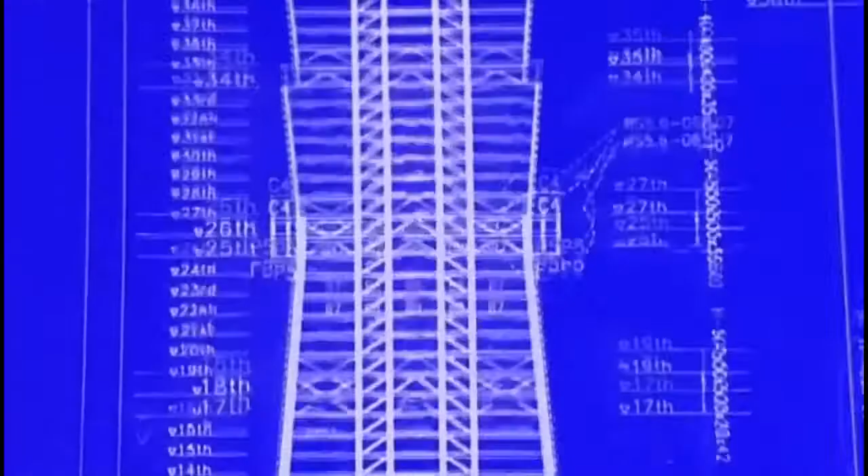Taipei 101, the world's tallest skyscraper. 508 meters of the most high-tech engineering and construction on the planet. Mixing ancient values with cutting-edge technology and taking the heart of Taiwan into the future.

Designing and building the world's tallest skyscraper is no easy task. But here in Taipei, two of the most powerful forces of nature, earthquakes and typhoons, combine to make going super tall a super challenge. I mean, any tall building in the world is a feat of engineering. Using world-leading engineering and construction techniques, Taipei 101 not so much conquers nature, but outsmarts it.

This is the only super tall building in the world that's designed in a seismically active zone. This has never been done before, certainly not to this scale. The result is a man-made marvel, a unique megastructure of unprecedented size, shape and technology, built to withstand the very worst that nature can dish out.

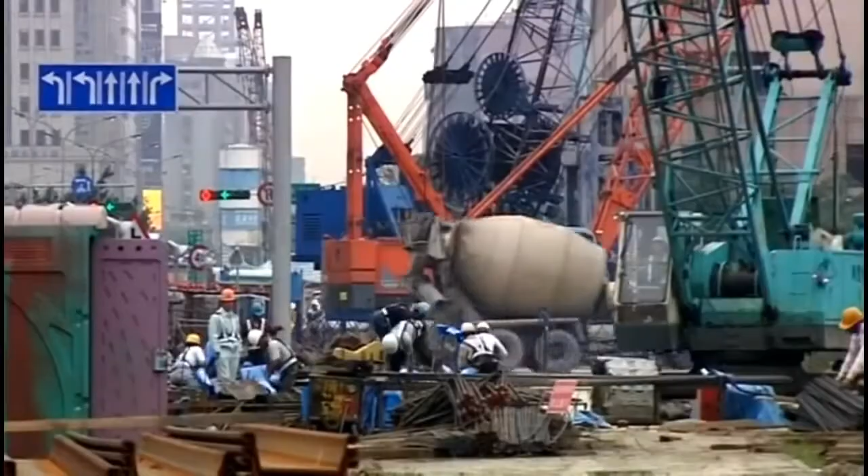If you're looking at the history of skyscrapers, really you begin in America, Chicago and New York are the classic cases. But in the last, let's say, 10, 15 years, Asia's really boomed with regards to the building of large structures. In recent years, Asia has seen an explosion of mega-scale building and industry. The region now holds 8 of the world's 10 tallest buildings. And as modern construction methods and materials continue to improve, designers will continue to aim ever higher. Not because they have to, but because they can.

Developer Harris Lin is one of the most powerful and successful businessmen in all of Taiwan. A member of a major construction dynasty, for him, Taipei 101 is the result of a lifelong ambition. Since I was a boy, I have dreamt that one day I would build a great building, one which will benefit later generations for a very long time.

For Harris Lin, Taipei 101 is more than just a building. It's a statement on Taiwan, its people and its future. A notice to the rest of the world that Taiwan has the technology, the industry, and the determination not just to join the giants of global industry, but to lead them. There's no better way, really, of getting global attention than building these super tall buildings, particularly if it's the highest in the world.

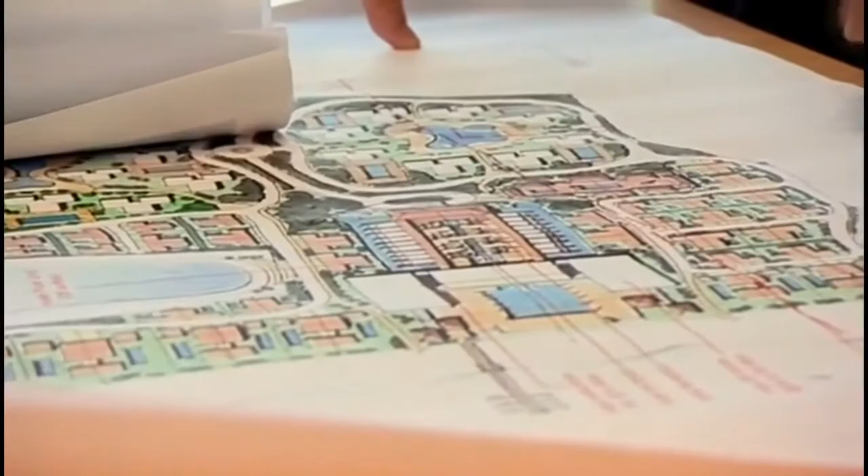Initially earmarked as the centerpiece for the growing and glitzy Xinyi district known as Taipei's Manhattan, the primary goal for the building is to be the best, but not necessarily the tallest. Long-standing friend of Harris, architect C.P. Wang from C.Y. Lee & Associates, comes into the project in the early stages. We started with 3 buildings, a 60-story building in the center and 2 smaller buildings that are about 20 stories for the different shareholders. But plans quickly evolve as key investors clamor to have the building push up, not out.

The planned 60 stories soon turns into 88. And with the mantle of the world's tallest a mere 13 floors away, the momentum becomes unstoppable. We truly believed we could do it. That if we worked hard, we could make a building that was visible to the entire world.

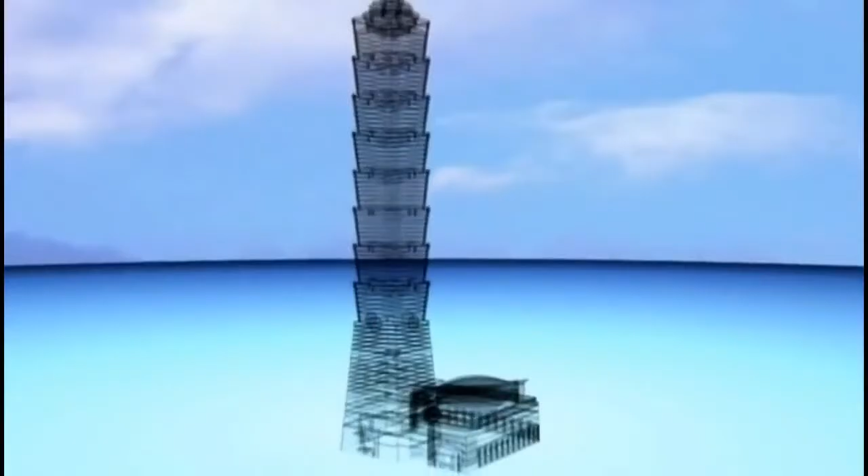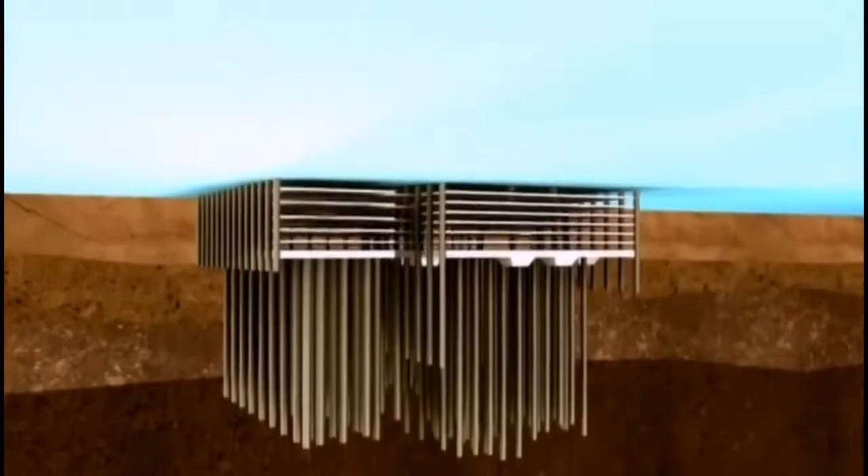But three factors combine to make this project not only the tallest and most visible in the world, but also one of the most difficult to build. Taipei City is an inhospitable place to build a skyscraper. Beneath the earth, a thick layer of soft clay demands uniquely designed foundations. While above ground, the threat of earthquakes and typhoons requires a level of engineering and construction never before achieved.

If Harris Lin wants to make the tallest building in the world here, his engineers and builders will have to confront the power of the earth. Designing a structure flexible enough to resist an earthquake, but stiff enough to resist a typhoon. Contradictory requirements that until now have never been combined. All these different mixtures of elements have to be blended almost superbly in order to make the building achievable.

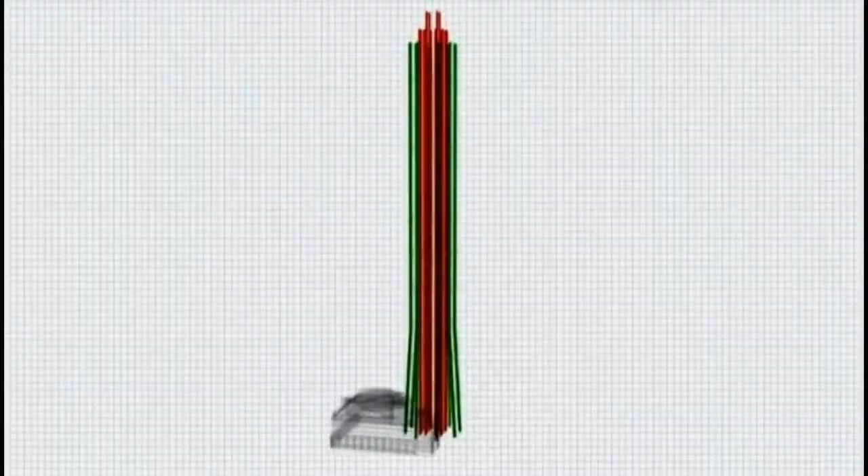The solution will combine two revolutionary systems. First, a braced megaframe joined to 8 super columns filled with a mixture of steel and concrete. And a tuned mass damper, a giant pendulum, the weight of 10,000 people, designed to oppose the effect of wind. The combination of these two concepts is groundbreaking. I am very proud of it, and as architect, you don't get a lot of opportunity to work on something of this magnitude.

Construction will take 6 years, 2,000 workers at any one time, and 700,000 tons of the most advanced steel and concrete ever made. These cost more than the national GDP of some countries. Yet despite all the investment, ingenuity, and determination of humankind, the forces of nature can strike at any time, whether you're ready or not.

Taipei 101 will be built to withstand earthquakes and typhoons, but it also needs to withstand the test of time. To be a true landmark, it must look unique. Its appearance mixes traditional Chinese icons, bamboo for strength and resilience, a pagoda for serenity, the perfect form of an open flower, and the luck and prosperity associated with the number 8.

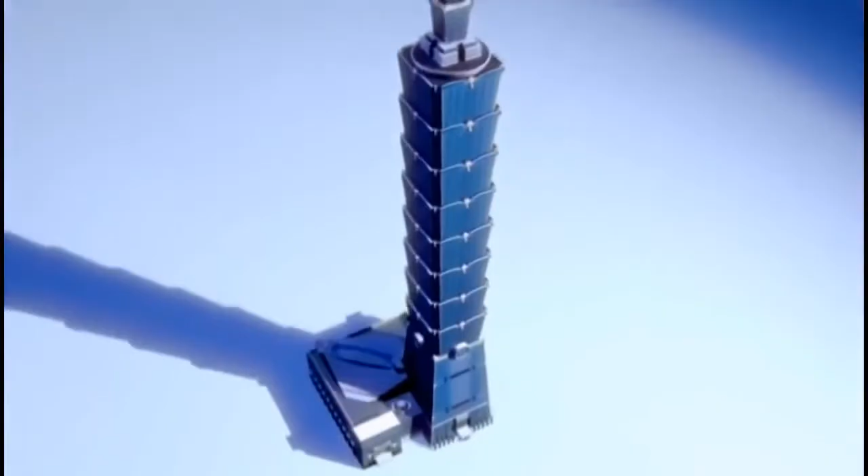We tried very hard to do something that we hope can represent the city, the island, as well as our culture. The result is this: 508 meters tall, 101 floors from ground level. A building that looks completely unique, but soon proves challenging to build.

Every major skyscraper in the world is a trade-off between what will look good and what will stand up. For a tall building this height, you cannot escape the practical matters. It has to work. Taipei 101 will be the tallest skyscraper on Earth. And the forces on a building of this scale are truly immense.

Gravity forces it down, while wind pushes it sideways. Existence is a tenuous balance between being strong enough to stay up, but not so heavy as to cause collapse. Most skyscrapers have exterior walls that are either straight up and down or sloping in. But Taipei 101's unique shape sees much of its exterior surface sloping out.

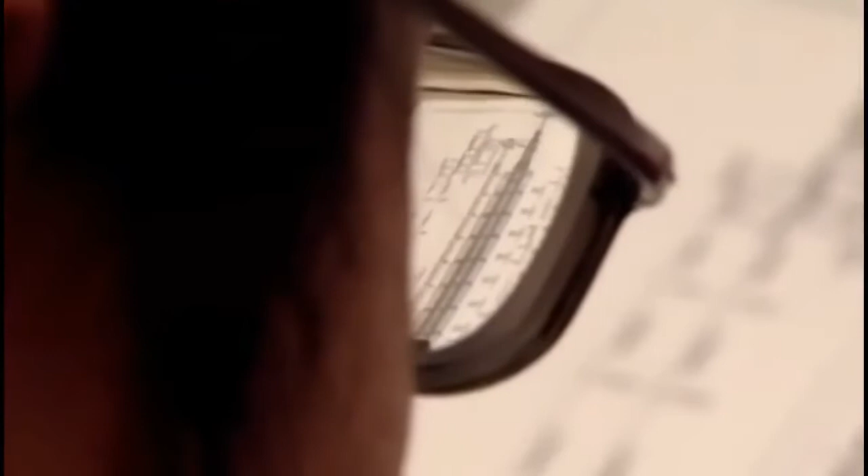Here at Evergreen Consulting, engineer Shaw Shi oversees plans that will translate Taipei 101's unique exterior into one of the strongest, lightest, and most resilient interiors ever made. The shape of Taipei 101 is more complicated than regular tall buildings, because simple and straight lines will be easier to work with.

Aesthetically, Taipei 101 is broken into sections resembling a stem of bamboo. But similarities with this fast-growing superplant don't end here. Just like bamboo, the distinct structural sections of 101 strengthen and support the whole building. Each section operates as an independent unit, transferring the building's massive weight away from the outside of the building and into the middle. The result is a stronger, lighter, and more flexible tower.

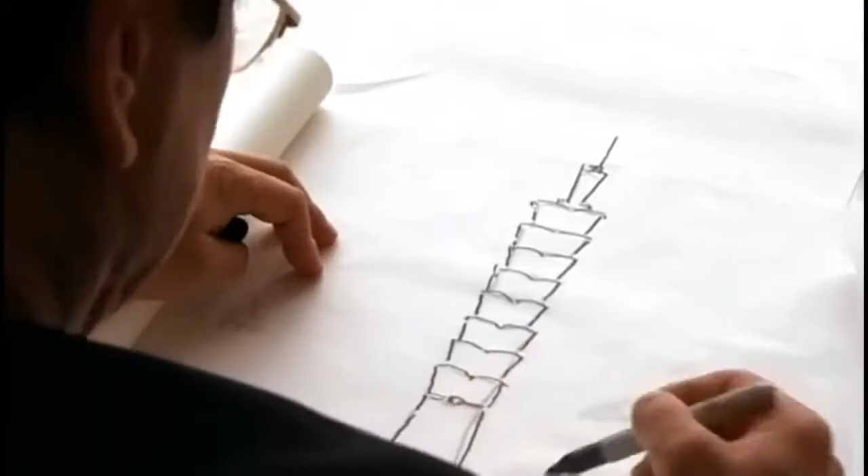For CP Wang, this sort of lateral problem solving has been integral to the success of the project. Their aim is not just to be the highest, but to be their innovative best. Let me put it this way, it's not like the Wright brothers when they invented the airplane. You know, today a lot of people know how to build an airplane, but how good it is matters.

The design of Taipei 101 requires unique engineering to facilitate a unique shape. But the next challenge facing designers pushes this engineering to the limit. How to make the tallest building in the world stand up against two of the mightiest forces of nature in one of the most hazard-prone cities on Earth.

Every year, the people and buildings of Taipei are under attack from two of nature's most primal and unstoppable phenomena. When you put a tall building on an old secondary earthquake fault line, which runs nearby here, and in a place where you get significant typhoons, that just has major challenges.

The problem is that to resist wind, a building must be stiff. But to survive an earthquake, it must be flexible. Taipei 101 will have to be both. This is the only super tall building in the world that's designed in a seismically active zone. This is really pushing engineering and construction boundaries right to the limit.

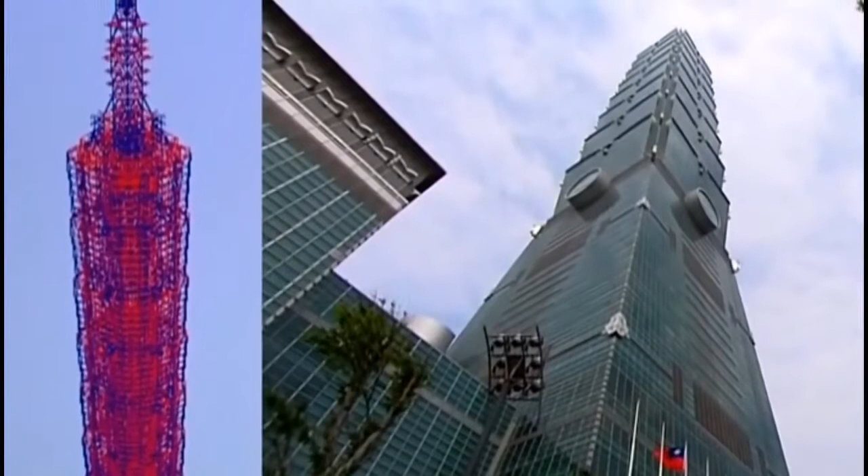Superficial damage like broken windows or walls can be repaired. But any damage to the internal steel framework of a building can be a disaster. As the tallest building in the world, Taipei 101 must be engineered to withstand major earthquakes. But just how major is something of a mystery.

Geologist Dunstan Chen is one of the scientists charged with finding out the details. This is when we make the first design, okay? We have to consider this fault. We know there's a fault somewhere here, but we don't know exactly where it is.

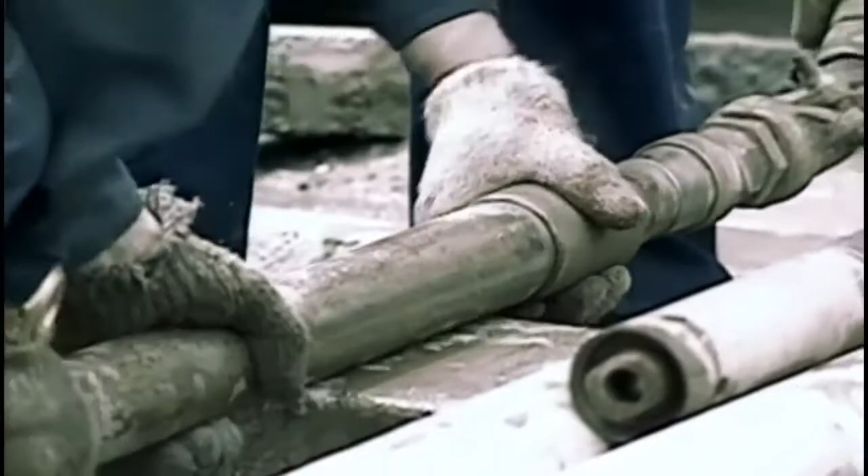An investigation is launched involving some of Taiwan's leading geologists to find out where the fault is and how far it is from the Taipei 101 site. They need to establish if it's active and how they should deal with it. The results shock everyone. Then we drill number 4. Okay, we encountered the fault. And this fault actually, the gouge was around 10 meters thick. It's a huge one.

In most earthquakes, the closer the building is to a fault, the worse the impact. The fault found by Dunstan and his colleagues is not only huge, it's close. Only 200 meters away from the 101 construction site. 101 must be prepared to face the most extreme earthquake shocks imaginable.

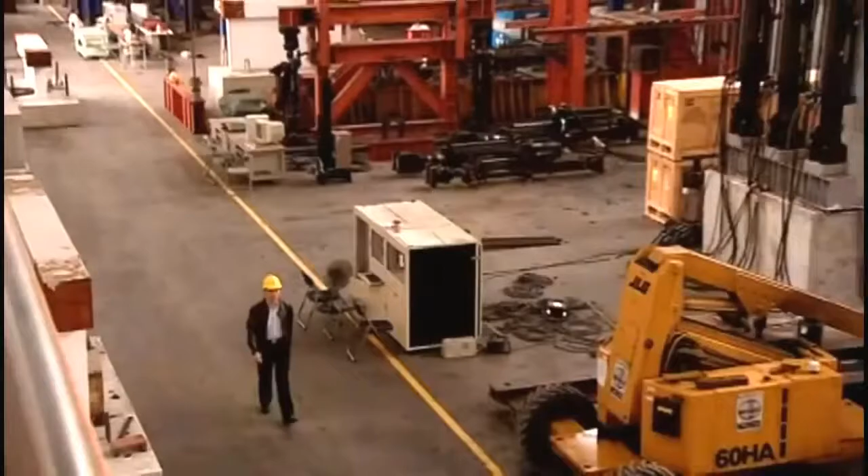Here at the NCREE facility, scientists use a multi-dimensional shake table to simulate a variety of different earthquake scenarios. Scale models of different structural configurations are tested, and the information gained helps to design buildings that are better able to withstand the devastating impact of earthquakes.

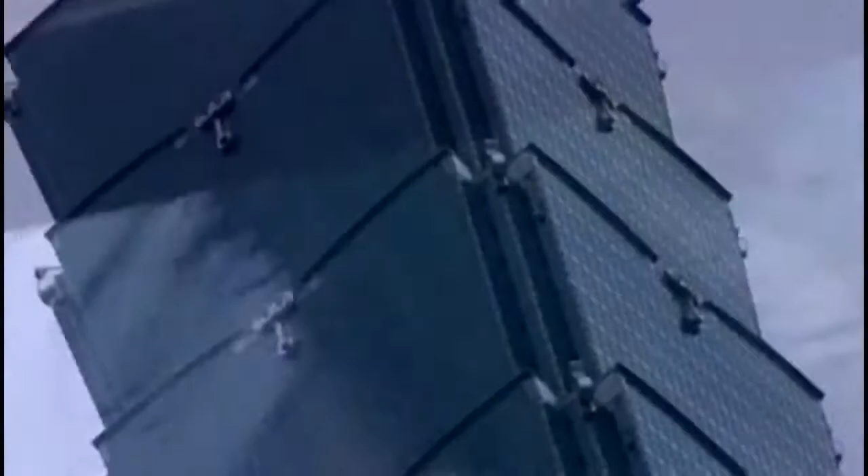An earthquake shock delivers brutal vertical, horizontal, and twisting strain on a building. Every joint of every structural element is strained, and if there is one weak link, the whole lot can go. To keep 101 standing in a major earthquake, engineers develop a complex internal megastructure. The central core of the building is connected to 8 incredibly strong supercolumns by a network of horizontal outrigger trusses.

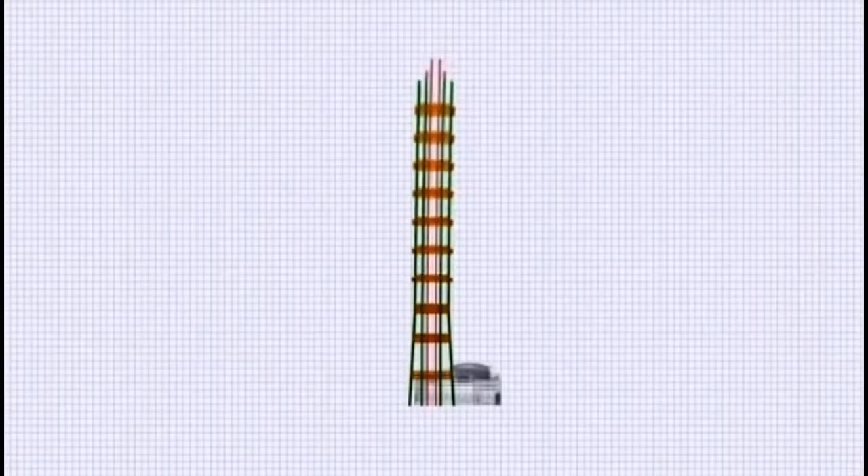The supercolumns act like a giant flexible spine, enabling the building to flex and move if it needs to, but not break. Although the idea of supercolumns has been used in other buildings before, the size of 101 takes this engineering to an entirely new level. But the threat of earthquakes isn't the only natural force that builders of Taipei 101 have to worry about.

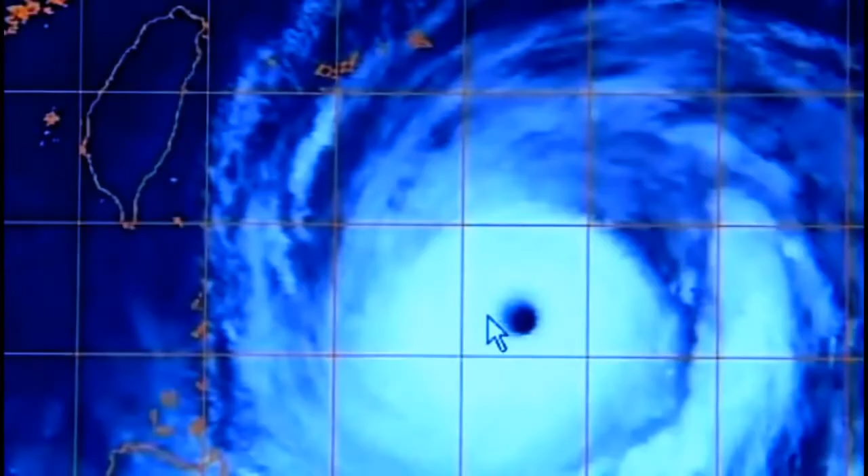Every summer, unstable equatorial air off the coast of Taiwan generates vicious typhoons that lash Taipei. These intense tropical storms, with winds of up to 200 kilometers per hour, can literally blow a building to pieces. But it's not just strong winds that designers of 101 have to worry about. The surface area of a skyscraper is so huge that even a small breeze can still have a major effect.

As wind hits a building, it impacts in 2 ways. First, the exposed face of a building can be pushed by the wind like a giant invisible hand. But under certain conditions, the wind can generate pulsing vortexes on opposing sides of the structure. The vortexes begin to oscillate, exerting small but consistent pushes on alternating sides of the building, eventually causing it to sway. Like a child pumping their legs on a swing, each gust of wind adds energy.

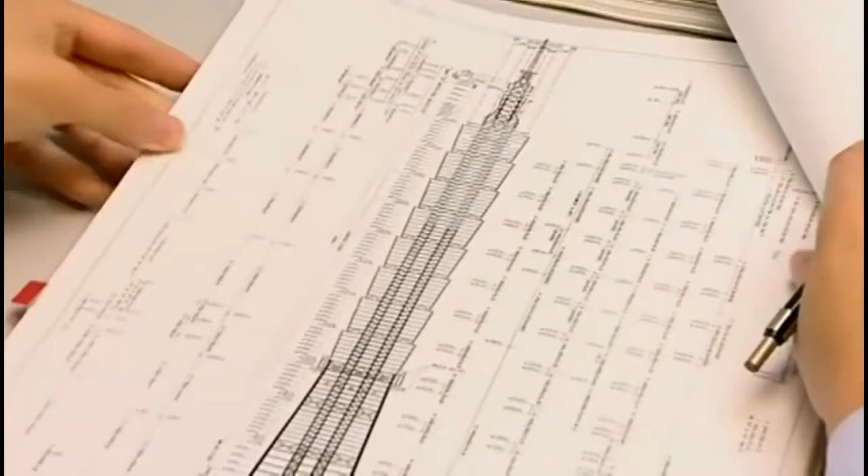This swaying can be so severe that occupants of high-rise buildings can experience motion sickness. Normally, engineers can accommodate this problem by making the internal structure of a building stiff and rigid. But being stiff is exactly what designers don't want in the event of an earthquake. Can engineers of 101 design a building that is both stiff and flexible at the same time? For the project to go ahead, they have to.

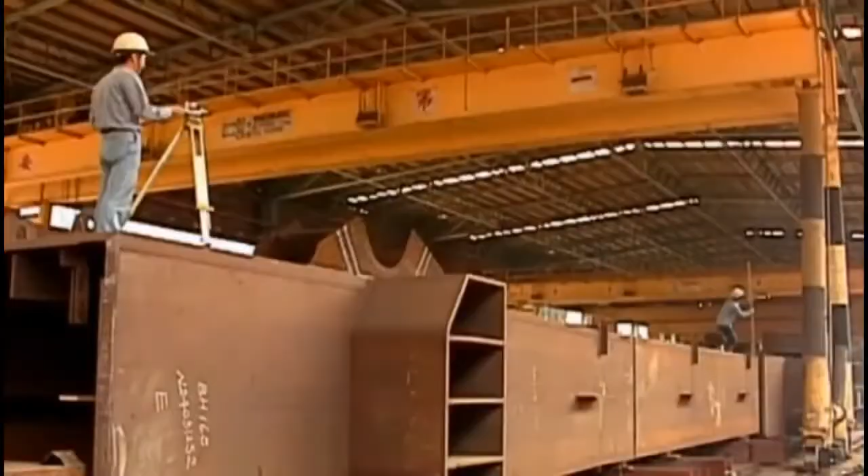Taipei 101 is so massive that finding ways to minimize the effects of wind is a vital element of its design. Engineers and scientists begin with the building's exterior. They find that by using re-entering or saw-toothed corners, the flow of wind around the building is drastically reduced. The results of wind tunnel testing: the re-entering corners help to reduce the dynamic wind response by 30 to 40%.

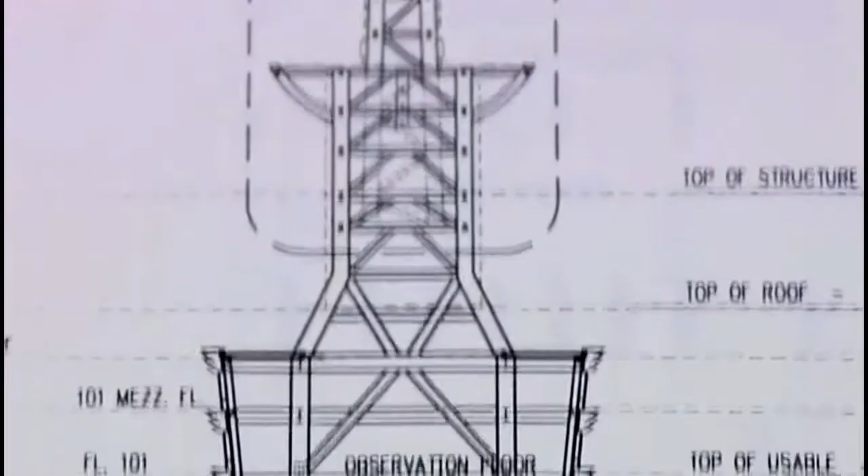Saw-toothed corners on a building hinder the formation and impact of the small wind vortexes that can cause it to sway. But just like the pumping of a child's legs on a swing, where each push adds energy to the last, even when the effect of wind on a skyscraper is reduced, energy will continue to gather unless it's removed. It's not the size of the push that matters, it's the repetition. If engineers can find a way of canceling this accumulation of energy, then the building's contradictory requirements of strength and flexibility will finally be met.

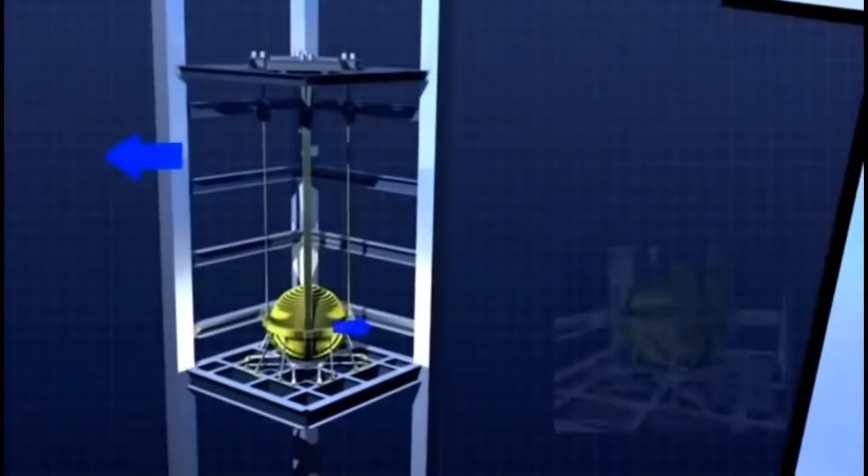Usually, a lot of tall buildings use so-called computer-controlled mass to do that function. In our case, I think our very smart engineers came up with this passive tuned mass damper. The passive damper on 101 uses a huge weight hanging from an upper floor to counter the effect of wind. As Taipei 101 sways in one direction, the tuned mass damper swings in the other, cancelling the buildup of energy and reducing the building's motion.

Engineers of Taipei 101 have made the impossible possible, designing a building that is stiff enough to survive a typhoon, yet flexible enough to survive an earthquake. But although these ideas seem to work on paper, they are yet to be proven in practice. 101 is going to need a lot more than just new design to combat nature. It's going to need entirely new materials and construction methods as well.

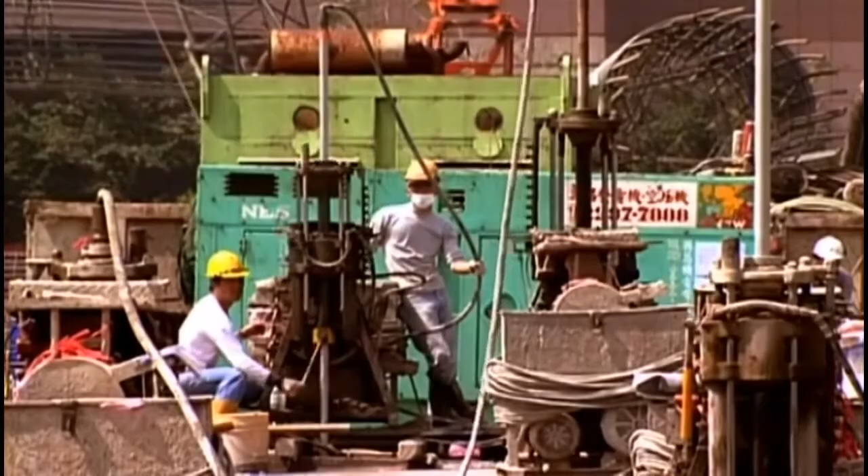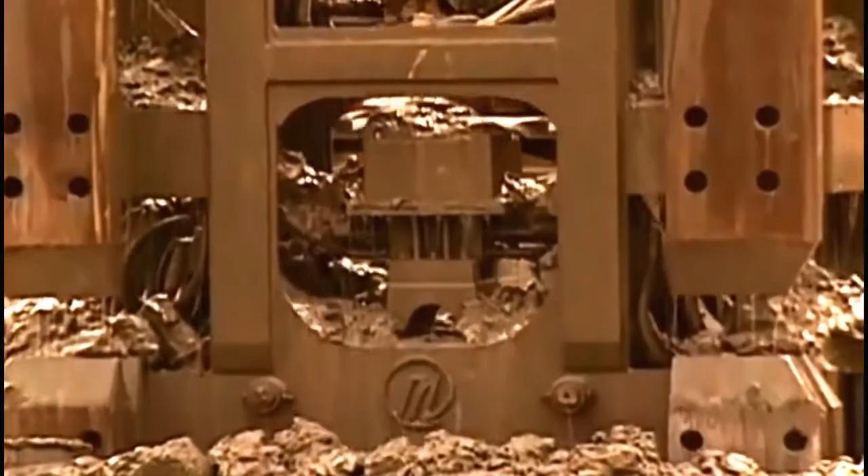Taipei 101's unique megastructure and wind damper will make the building resist the impact of earthquakes and violent storms. But all of this engineering means nothing unless the giant building has a solid foundation on which to sit. Finding solid ground in Taipei is a lot harder than it sounds. Over hundreds of thousands of years, changing sea levels have filled the Taipei Basin with layers of soft, unstable silt and clay. In order for the tallest building in the world to remain standing, its foundations must penetrate through this layer, sometimes 60 meters thick, to find the solid bedrock below.

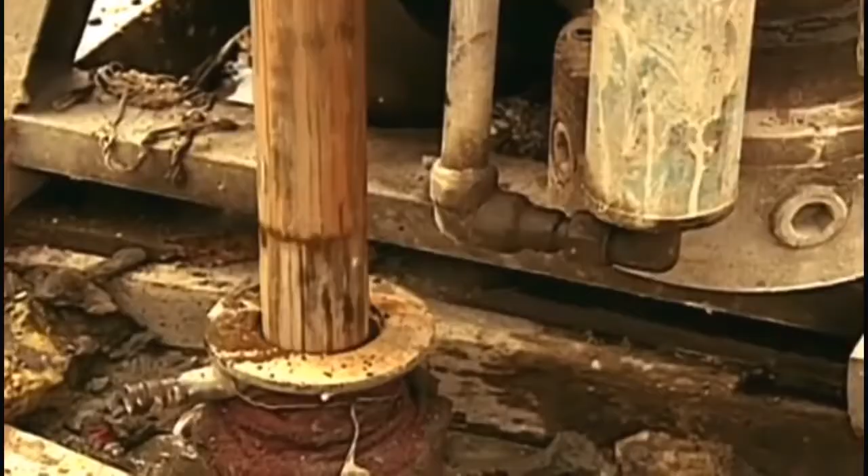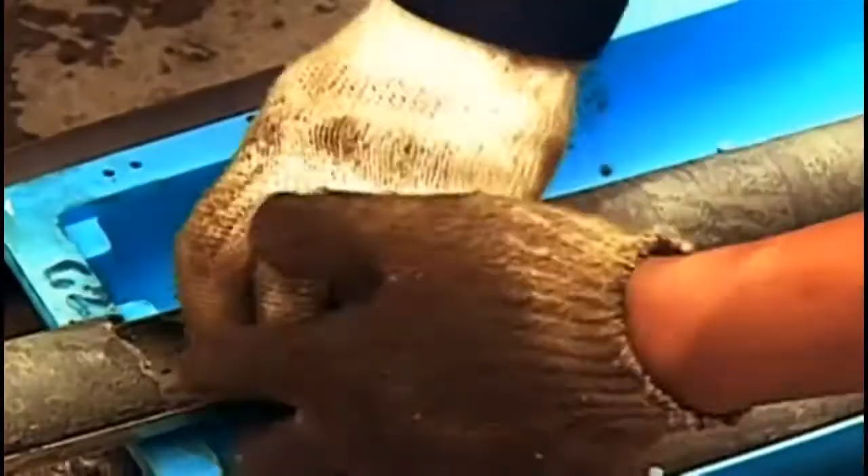Geotechnical engineers spend 8 months collecting core samples to analyze the soil on the building site. They find 3 distinct layers of soft sediment before finally reaching solid ground. This information helps designers to develop detailed plans for 101's foundation structure. Preparing the foundations takes 15 months and removes 700,000 tons of earth from the site. The foundation of a skyscraper is one of its most vital structural elements. It must distribute the building's enormous weight evenly below ground, at the same time creating a super strong base for the towering megastructure above. That's the key point for the whole building, that the building can stand up into the sky.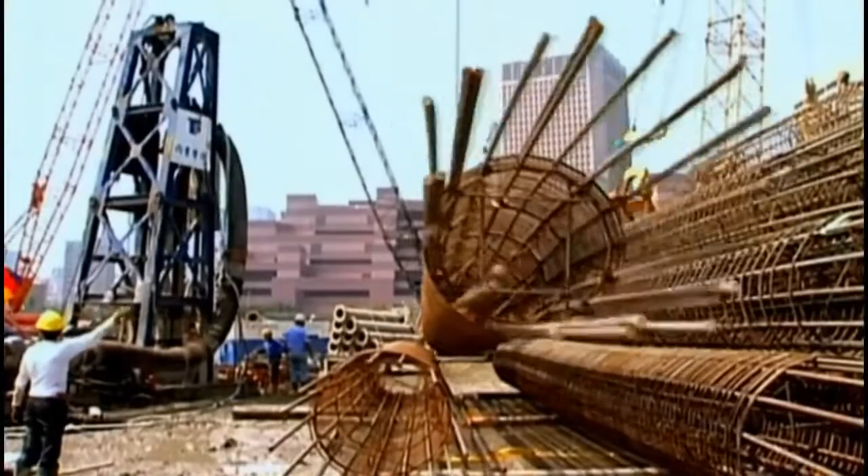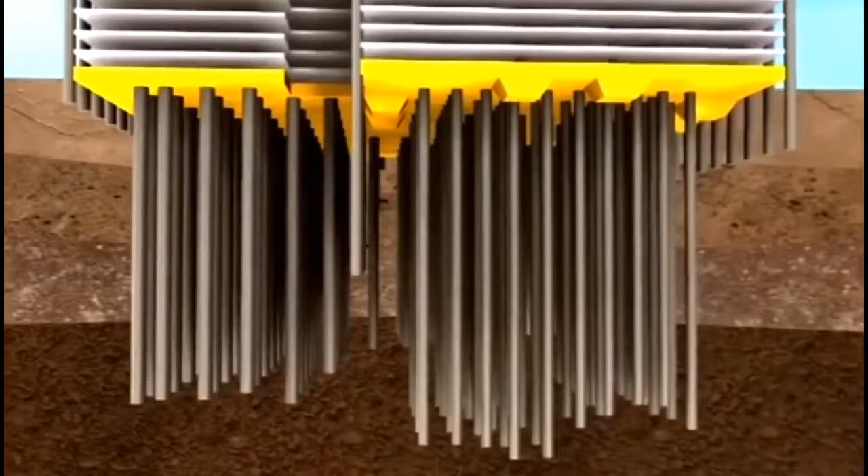To compensate for the inherently unstable ground of Taipei, 101's foundation is designed to literally pin the building to the deep layer of bedrock below. A 23,000 cubic meter concrete slab sits on top of a complex system of 382 reinforced concrete piles. These piles transfer the building's weight and structure deep into the bedrock, meaning 101 is more than just resting on the earth. It's fused to it. This unique foundation, combined with 101's mega frame and damper, give the building an extraordinary earthquake safety rating that exceeds even that of Taiwan's nuclear power plants.

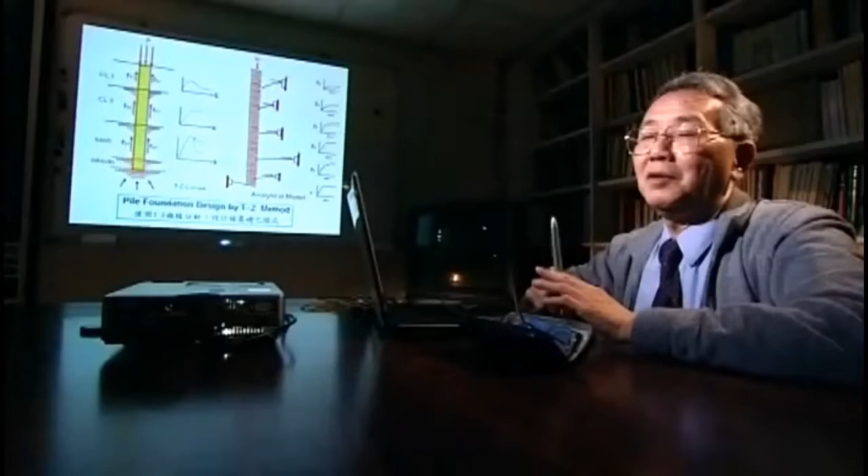Inside the 101, during an earthquake, you watch out for the falling articles, okay? Rather than worry about the falling of the building. Taipei 101 will not just be one of the strongest and most stable buildings in Taiwan, but one of the strongest and most stable buildings in the world. Building on the main megastructure begins in September 1999. If I look back, I feel it was more difficult than I expected. But I didn't feel that way when I was working and solving the problems every day. This isn't a construction workforce, it's a construction army.

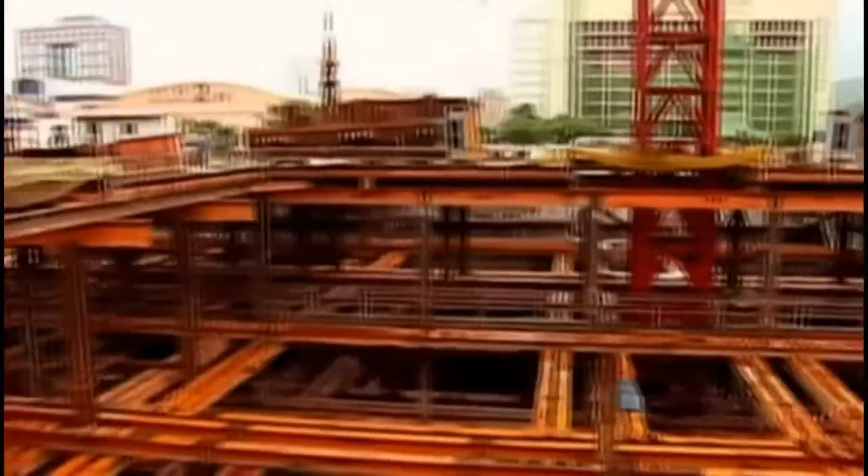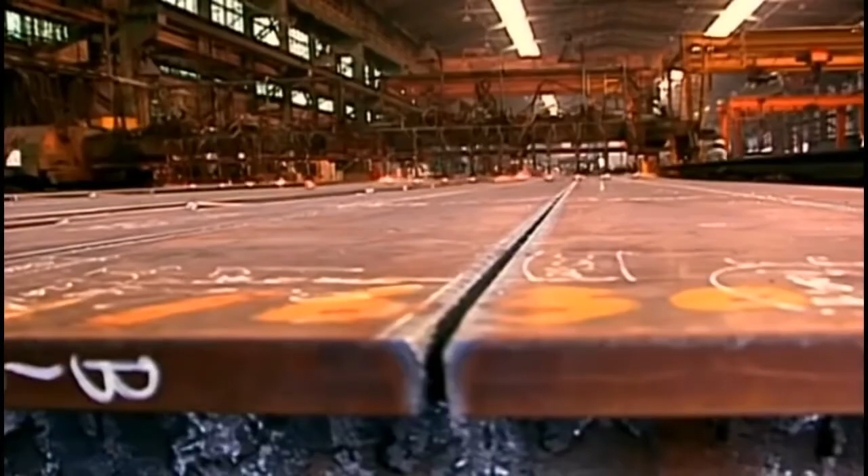Here at the Kaohsiung China Steel Plant, some of the most high-tech steel manufacturing techniques in the world are being used to build the various elements of 101's groundbreaking megastructure. The basic idea of this building is so-called double tube structures, which means we use the steel frame to create the outside tube, and then we use the steel frame and the concrete columns to create inner tubes.

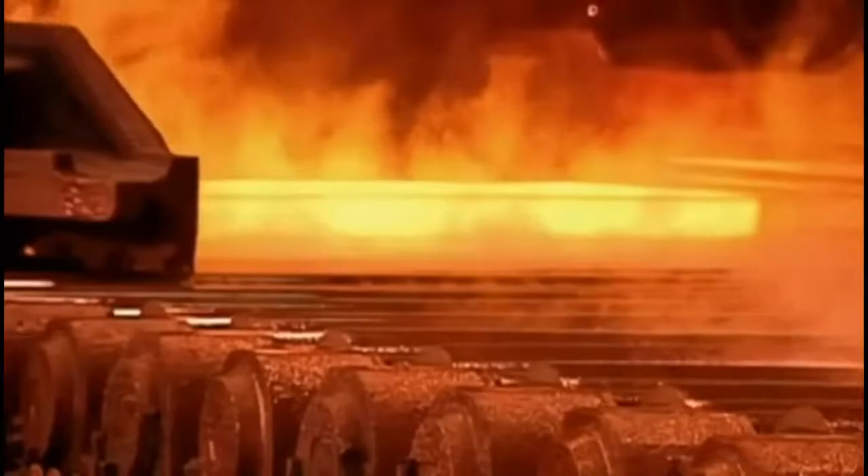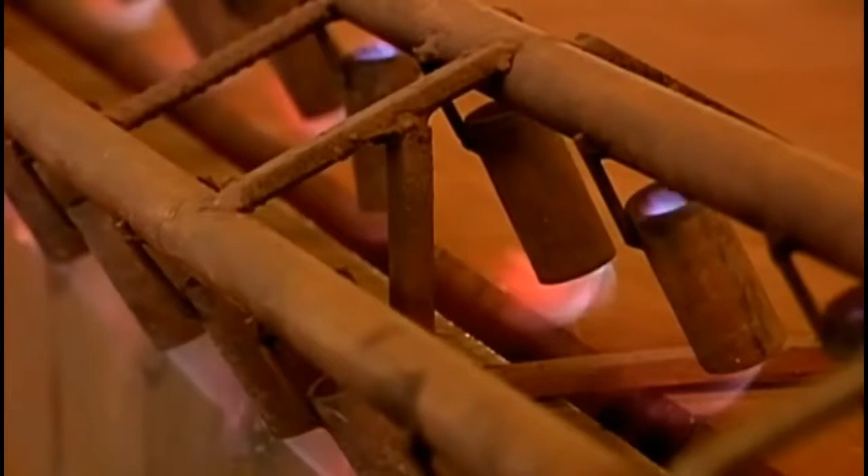The steel used in Taipei 101 needs to be soft enough to weld, hard enough to carry the building's awesome bulk, and pliable or bendy enough not to weaken or break if it's rattled by an earthquake. Each of these requirements demands a different type of steel, a complex chemical cocktail of carbon, alloy, and refined iron. More carbon makes it stronger, but too much and it becomes stiff, brittle, and hard to weld. The Kaohsiung plant develops 5 different kinds of steel for 101, each with a specific flex-to-strength ratio designed to suit its purpose and position in the building.

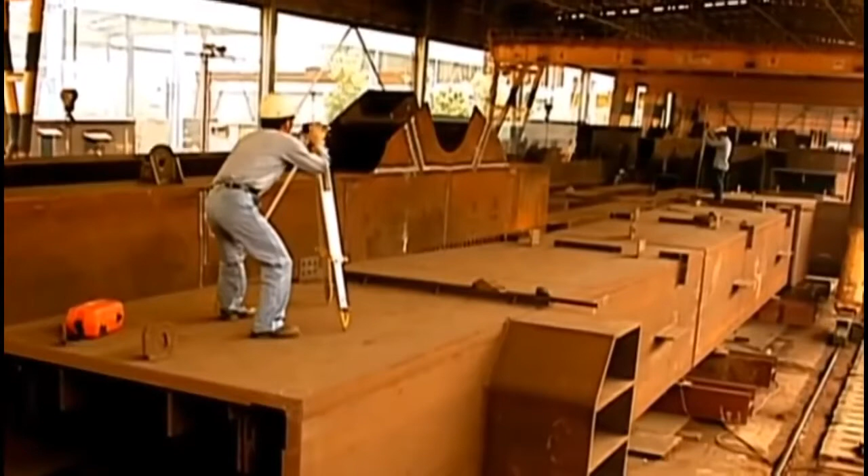The challenge for manufacturers is to make perfect steel into perfect components for 101 each time, every time, day after day. Starting with the raw materials, massive blast furnaces push out 10,000 kilogram ingots of refined steel.

The ingots are near liquid hot, 1200 degrees Celsius. An elaborate system of hot rollers and purification baths torture and squeeze the giant blocks into 90mm thick flat plates. Precision, control, and consistency are crucial. Any imperfections mean weakness, and any weaknesses could be fatal for the mighty 101 megastructure. Patterns, ID numbers, and cutting are all controlled by computer.

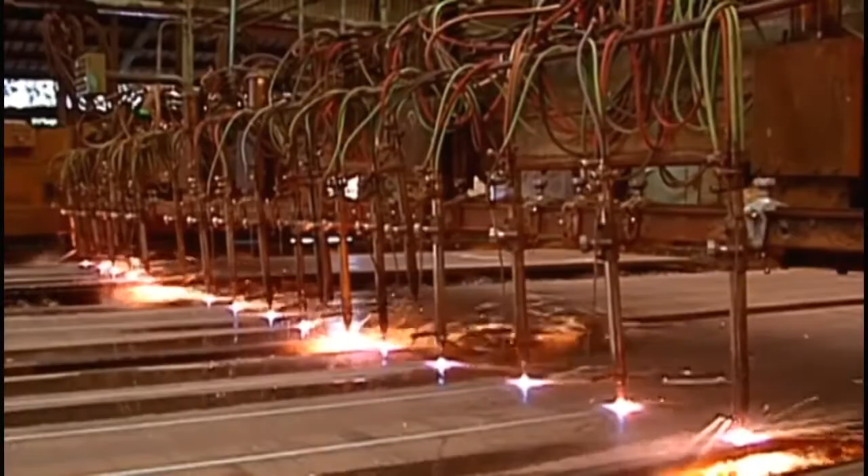This plant uses more electricity every day than a small city. From start to finish, each super column box section takes 4 months to make. The final product is big enough to park a car in, weighs as much as 90 tons, and is as tall as a 2-story building. Each of 101's super columns will need more than 50 of these box sections. That's more than 400 for the entire building. The next challenge facing builders will be to put them together.

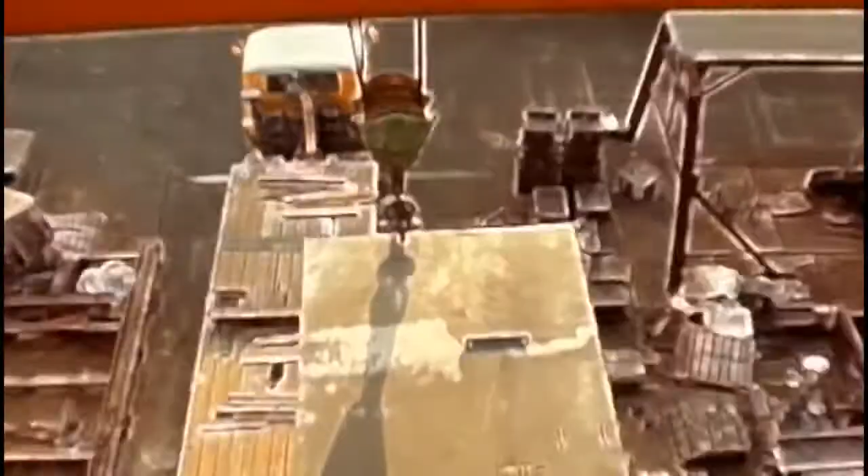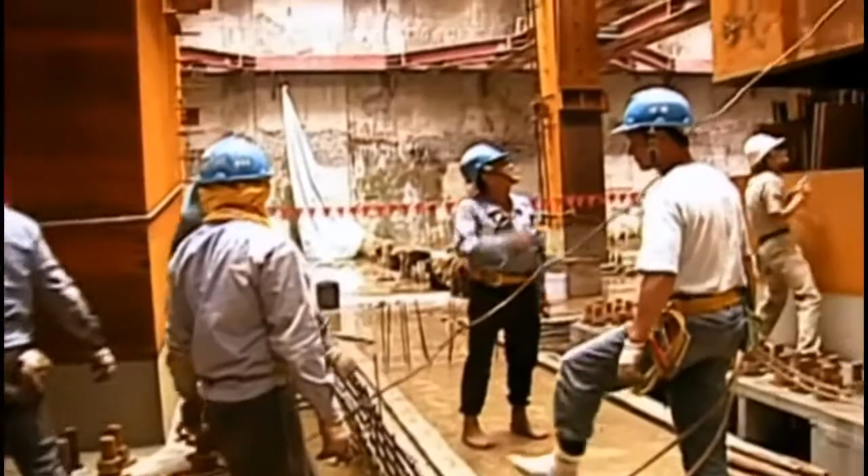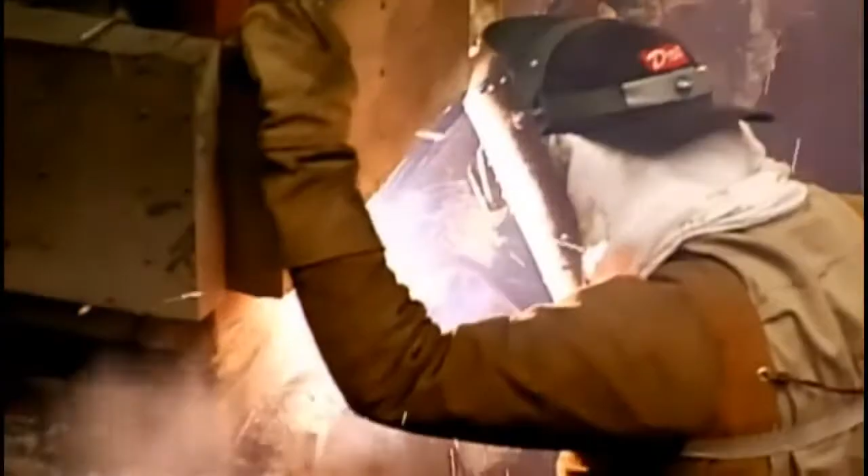The integrity of 101's megastructure requires the super columns to act as single units. But joining 50 90-ton box sections into one seamless unit has never been done before. Yet again, 101 will tread new ground. Ordinary welding techniques simply won't cope with the enormity and detail of the task. Every millimeter of every join requires absolute perfection. Teams of 6 welders work simultaneously.

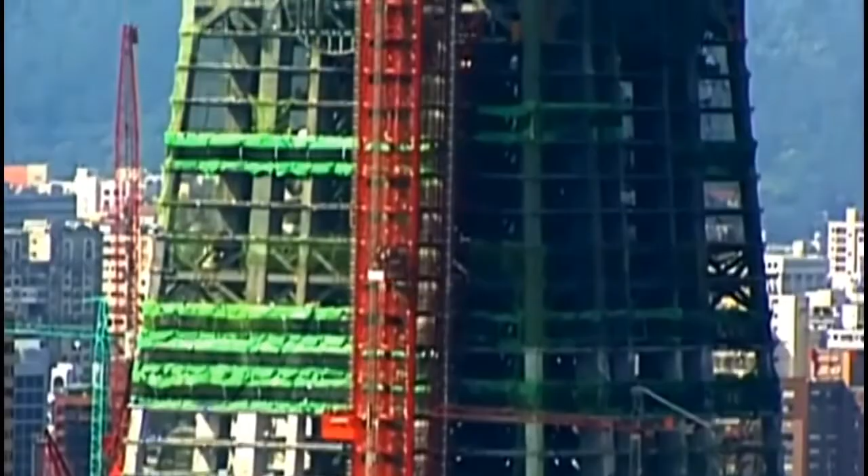The entire girth of each join has to be heated for the welds to bind. The scale of the task is mind-blowing. Each join takes at least 14 hours to complete. That's nearly 2 years welding in the super columns alone. The high-strength steel and advanced welding techniques used in 101's super columns give the building a strong and flexible backbone built to withstand the shock waves of a severe earthquake.

But dealing with the building's incredible weight demands an entirely different type of strength, one that steel alone cannot provide. A building usually has 2 types of force, the tension force and the compression. And we all know steel works better for tension, and concrete works better for compression. The awesome weight or compression loading on the world's tallest structure would crush the super columns if they were hollow.

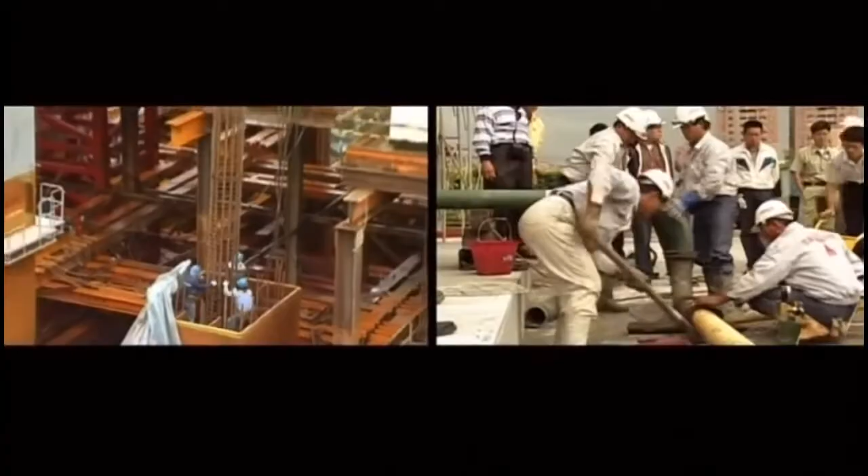But filling them with concrete to the 62nd floor combines the tensile strength of steel and the awesome compression strength of concrete. Making the system even more robust, engineers develop a concrete mix that is 60% stronger than normal. Concrete able to withstand an awesome 10,000 pounds per square inch of compression. The combined benefit of steel and concrete gives 101 the strongest, lightest, and most flexible backbone of any skyscraper on the planet. A backbone that is about to be put to the ultimate test.

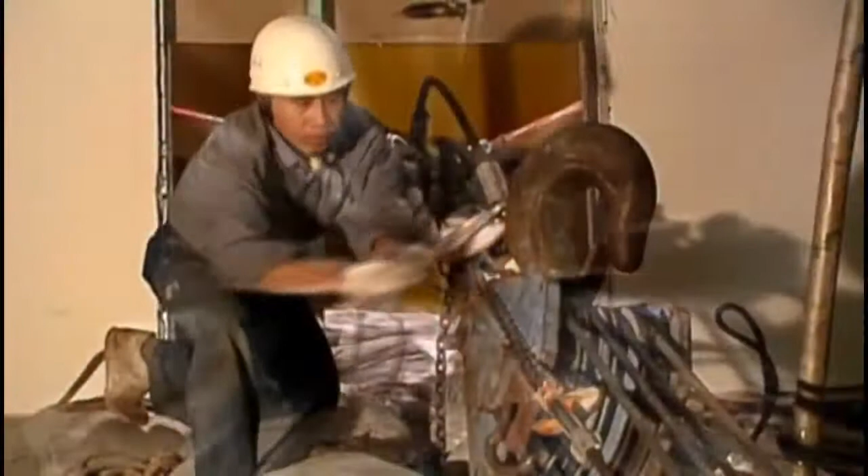2:52 p.m., March 31st, 2002. A magnitude 6.8 earthquake rocks northern Taiwan. The entire island is brought to its knees. And in Taipei, only 135 kilometers from the quake epicenter, over 100 houses are destroyed and at least 5 buildings collapse. The quake wreaks havoc on the construction site of 101. 2 purpose-built cranes topple 240 meters to the ground. 5 workers are killed and dozens more injured. A taxi driver fleeing his vehicle is crushed. Taipei is a disaster zone.

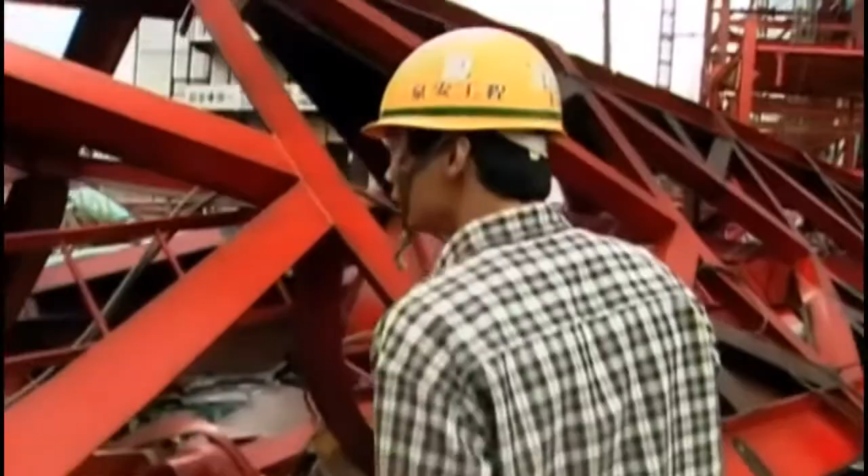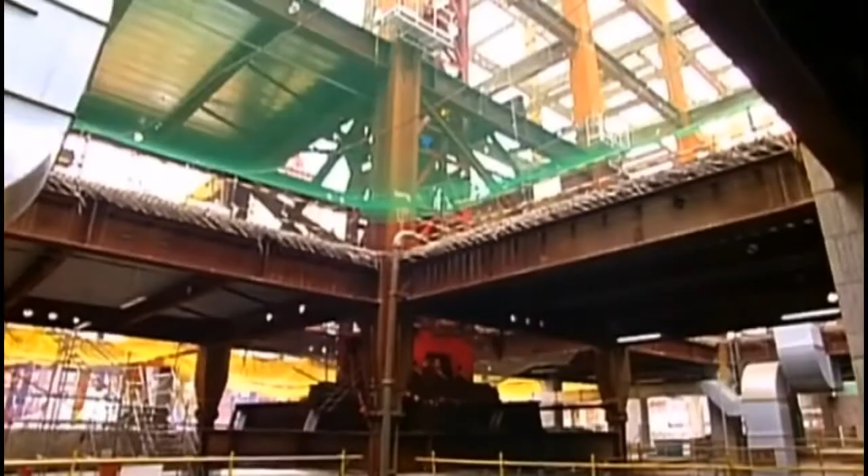All work on the building stops as aftershocks continue to strike. Insurance disputes rage, and engineers and surveyors check the massive building for hidden structural damage. It was a big challenge for me at the time. The 9/11 attack had happened in the USA just before, and so our people and our investors began to question whether we needed such a tall building in Taipei. The work ban continues, not just for days or weeks, but for 3 months. An earthquake, the very force 101 has been designed and built to survive, now threatens to destroy the building's future. Not physically, but financially. Morale plummets, and a dark cloud hangs over the project.

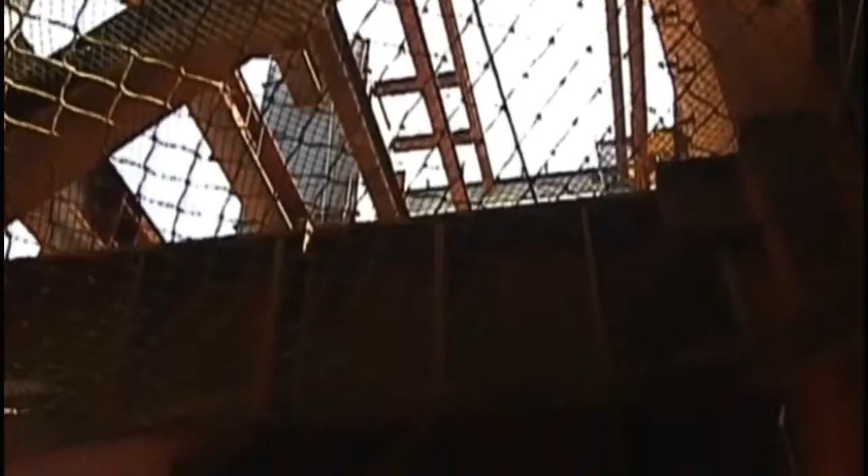Finally, in July 2002, the building surveyors give 101 a clean bill of health. The internal framework is intact, and once more work can resume. But the victory is bittersweet. No scientific test could have proven so effectively that 101's megaframe can resist a severe earthquake. But no scientific test would have come at so great a cost. The notorious March 2002 earthquake has put 101's megaframe under the most extreme test imaginable.

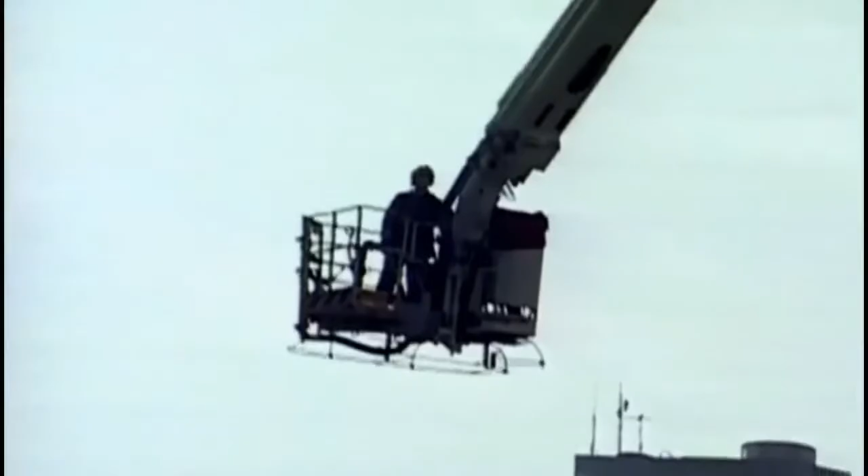But as work resumes and the skyline of Taipei is increasingly dominated by 101, a geologist from a prestigious local university discovers a worrying combination of data. Although only one severe earthquake has struck Taipei since work on 101 began, there has also been an unusually high number of smaller ones. Taipei 101 might not just be the victim of recent quakes, it might be the cause. When the second earthquake occurred again, almost in the same location, then I took it very seriously to do some research work.

The fact that Taipei is a seismic hotspot and that 101 is built only 200 meters from a dormant fault line is common knowledge. But the powers of the Earth are often hidden. And despite the combined effort of geological scientists the world over, accurately predicting when and where an earthquake will strike is beyond us. Dr. Lin believes the enormous weight of 101 may have reawakened Taipei's dormant fault lines, increasing the threat of earthquakes, not just to the building itself, but to the entire city.

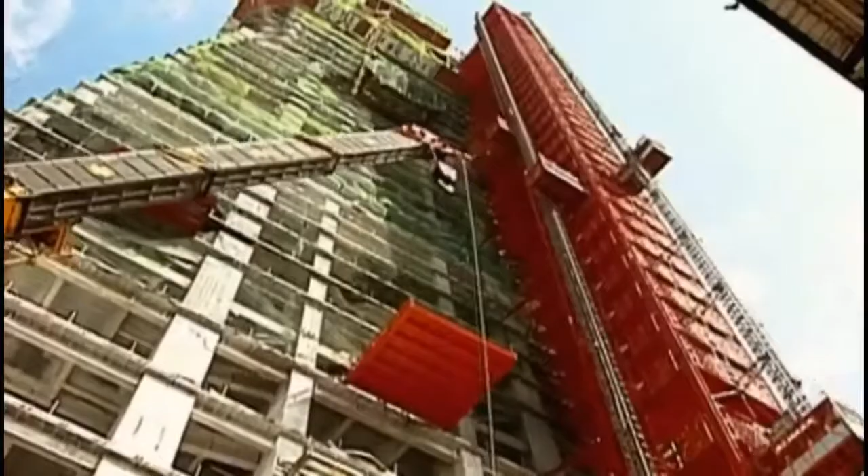Although Dr. Lin cautiously states that this theory is not yet scientifically proven, the circumstantial evidence seems compelling. Smaller earthquakes, and more often, since the construction of Taipei 101 began. But foundation engineer Dunstan Chen explains why he believes this hypothesis is fatally flawed.

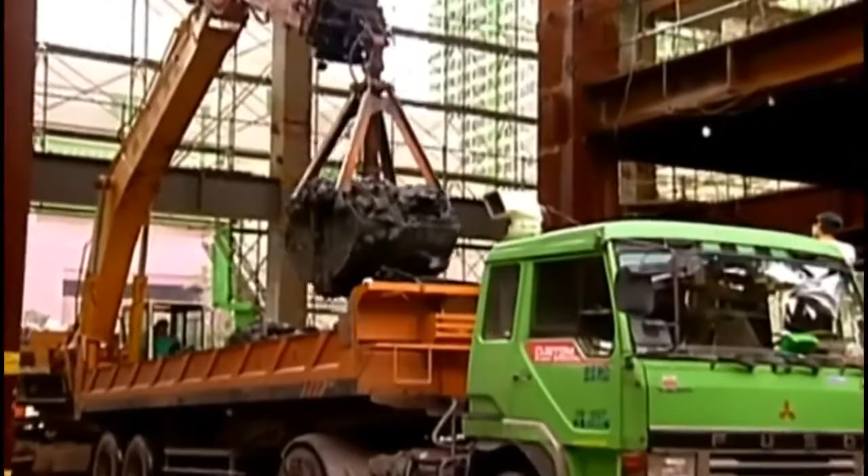That's actually at the beginning. For every high-rise building I built in Taiwan, we consider the weight of the structure should be more or less equivalent to the soil you excavated. The net change in pressure on the Earth as a result of 101 is nil. 700,000 tons of construction has gone up, but 700,000 tons of earth was dug out to build it.

The unpredictability of seismic activity means that either way, we may never know for sure. And regardless of what causes the frequent earthquakes in Taipei, this man-made marvel is being built to withstand them.

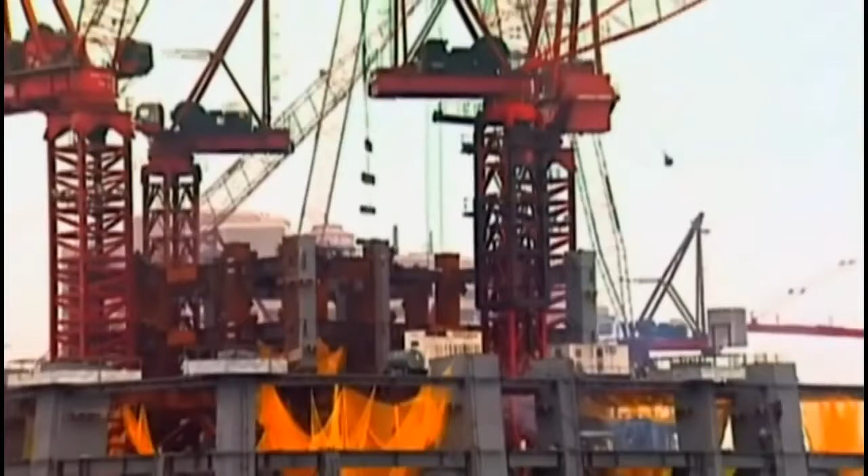On the construction site of any super tall building, the difficulty of getting materials up to the action is one of the greatest logistical challenges. The primary tool for this on 101 is a series of 6 self-erecting construction cranes. The biggest, strongest, and most advanced on the planet, these cranes are able to shift thousands of tons straight up in a single day. But their most ingenious feature, and the one most crucial to the construction of a mega skyscraper, is their ability to self-erect, to grow with the building around them.

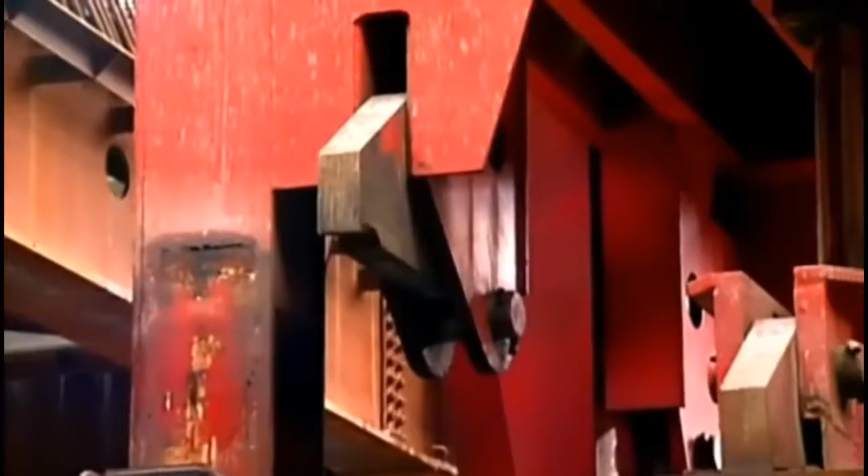To do this, powerful hydraulic rams lift the entire top mechanism of the crane. A new tower section is then placed in the gap, cross members secured, and progress resumes as normal with almost no interruption to workflow.

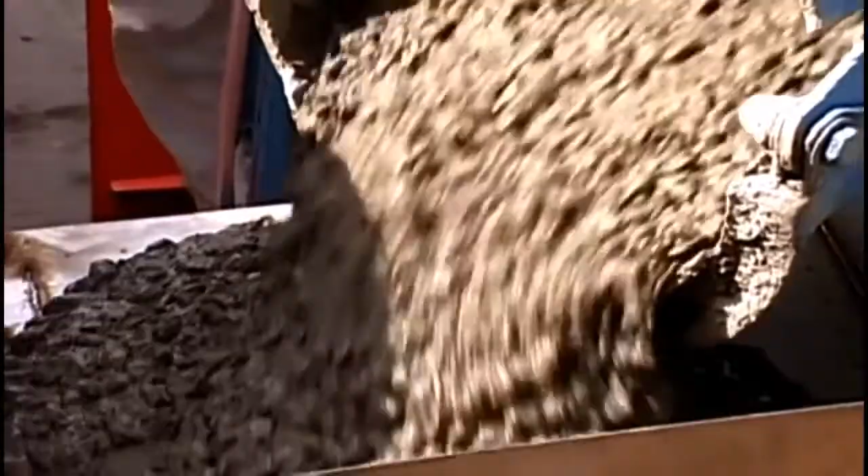Although concrete is one of the oldest and most widely used construction materials, it's incredibly heavy and, like a liquid time bomb, has to be pumped into position before it sets. These two factors pose a major challenge for construction workers on 101. The concrete they use here doesn't just have to get from the plant to the building, it has to get up the building as well. Once you leave the batching plant, within 2 or 3 hours, you have to arrive on site and start pouring.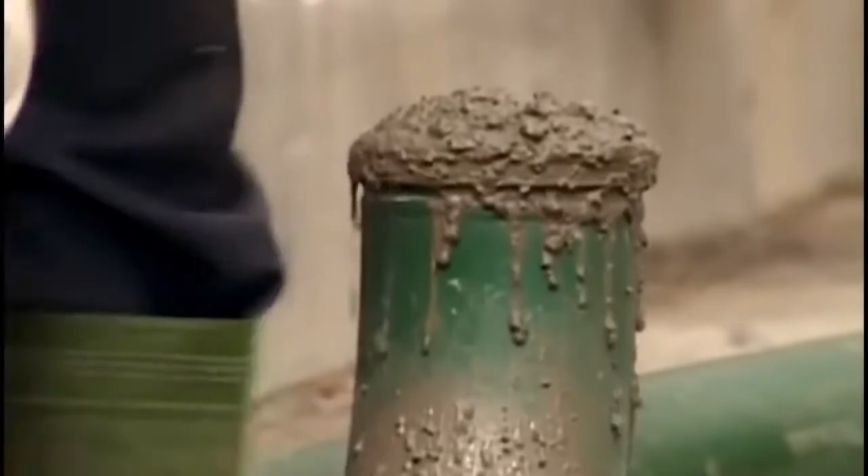To do this, engineers develop concrete with specific levels of viscosity or runniness and specific drying times. This buys them valuable time and helps the powerful concrete pumps to work more efficiently. The result is yet another world record for 101. Concrete is pumped from ground level to 450 meters. That's higher than any other concrete pour in history.

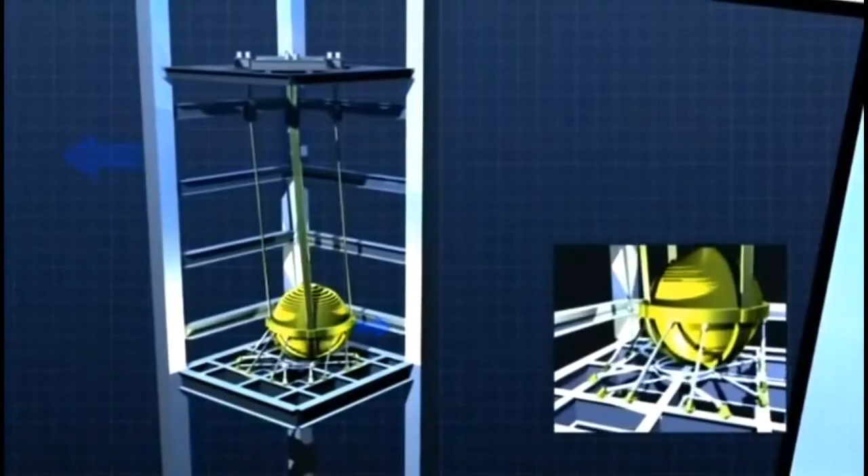Construction reaches the 92nd floor in July 2003. Although nearing completion, the technological crown jewel of 101 is yet to be put in place. The tuned mass damper, the crucial windproofing mechanism designed to counteract the horizontal sway of 101's massive bulk. Although mass dampers have been used in skyscrapers before, they've never been this shape, they've never been this big, and at 380 meters, they've never been this high up.

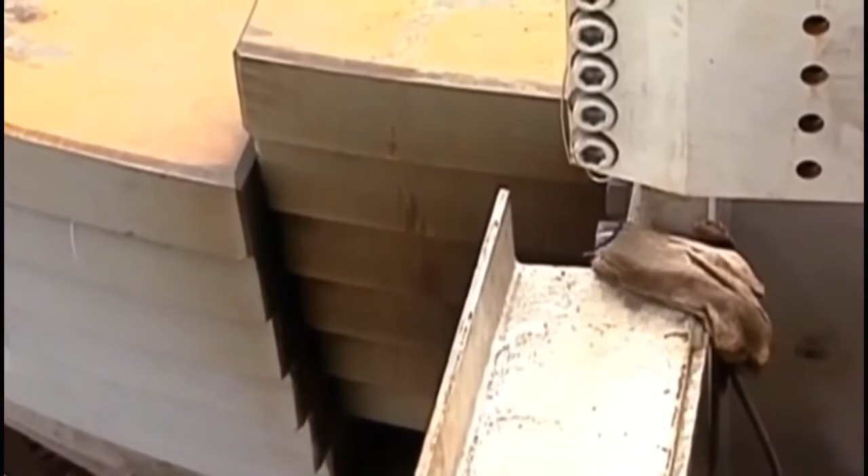To be effective, the damper needs to be 1/10 of 1% of Taipei 101's total mass, a staggering 660 tons. Not even the awesome Taipei 101 cranes can lift something this huge and heavy. The ball arrives in prefabricated sections, which are then welded together on site. It's then hung from 16 10-centimeter thick cables and tuned to make it swing in exactly the opposite direction to the building.

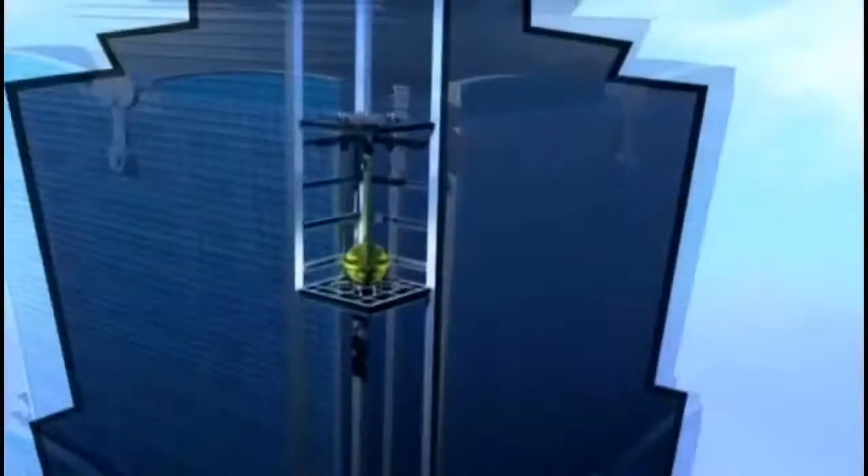When the building moved by the wind, it would go against it and balance it out real quickly, very much like the shock absorber of a car. And I think this idea has not been used in any other building that I know. So I think we're the first one to try that. In principle, it works like a simple counterbalance. But in reality, things are a little more complicated and a lot more clever.

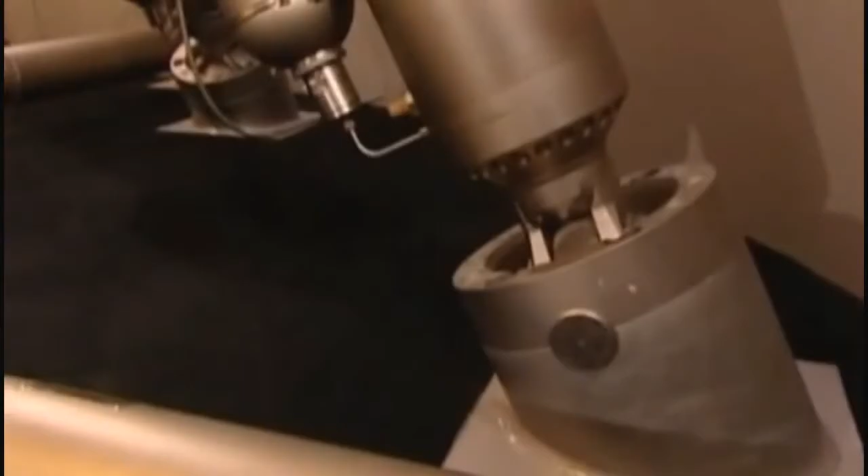To stop the damper from rocking either excessively or out of sync with the building, the ball is attached to a series of hydraulic dashpots, like mega shock absorbers, that stifle the ball's movement. If the damper experiences a particularly sudden jolt, such as an earthquake, the hydraulic resistance in the dashpots is strong enough to create a lockdown effect, meaning that the big golden ball in the sky will stay exactly where it is.

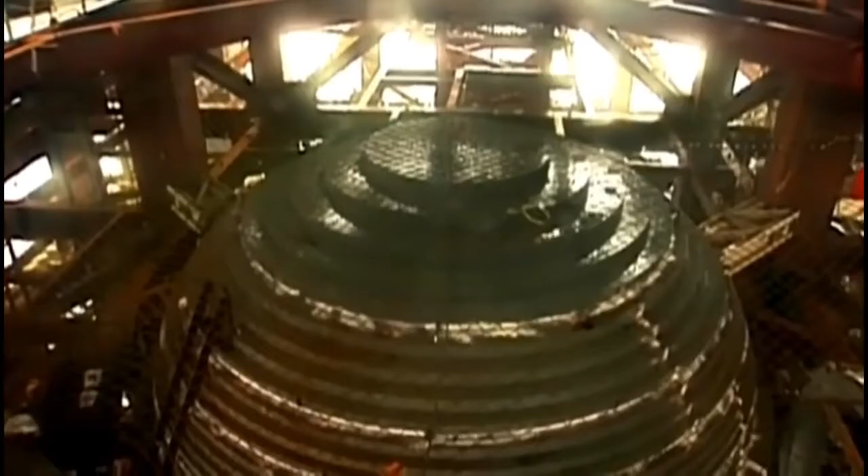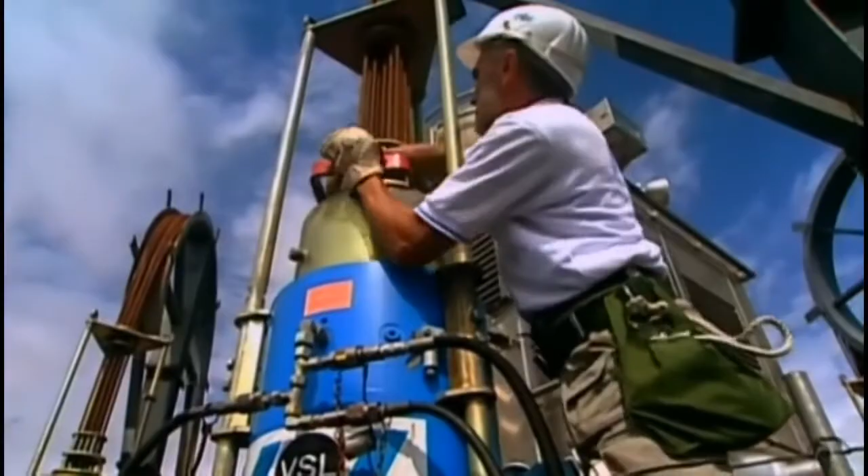If the mass damper is the technological crown jewel of 101, then the 60-meter pinnacle at the very peak of the building is the aesthetic equivalent. By late 2004, all major structural work has been finished on the main body of 101. Although this marks the successful completion of one of the most remarkable construction endeavors ever attempted, 101 is still 4 meters short of being the tallest building in the world.

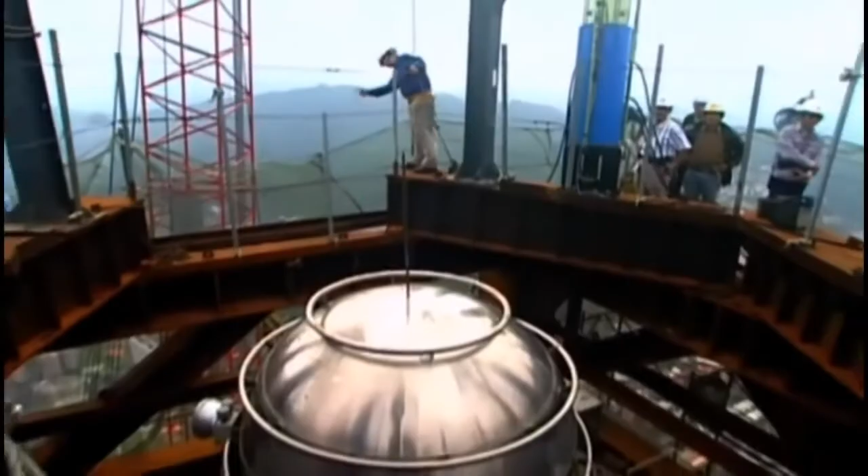Successfully raising the pinnacle will assure them the title, but at 400 tons, it will also be a logistical nightmare. Nothing this heavy has ever been lifted in this way at this height. It's not just difficult, it's dangerous. A system of hydraulic jacks and geared cables lifts the massive structure from its base. Progress is painfully slow, but victory is the only option.

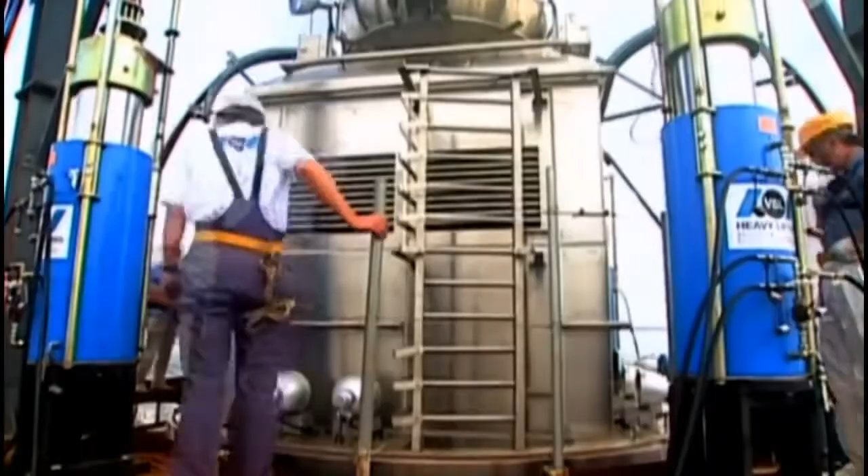Finally, after 14 days, the pinnacle is secured. Against all odds and against nature, the tallest building in the world is complete. Yet although this marks the end of one phase of the building's life, it is the beginning of another. Today, some of the world's biggest corporations boast offices here, and in peak periods, up to 40,000 people come in and out of the building every day.

It's like a city unto itself, only vertical. For a lot of people, until you see it, you don't believe it, nor do you understand it. Many of the everyday functions we take for granted are complicated exponentially by the addition of height, making the operations of this mega skyscraper a mega challenge. Every minute detail of the building is monitored and accessed in here, the central control room. From the speed of every fan on every air conditioning duct to each of the 96 elevators, Operations Manager Jeff Shu and his staff can see and control it all.

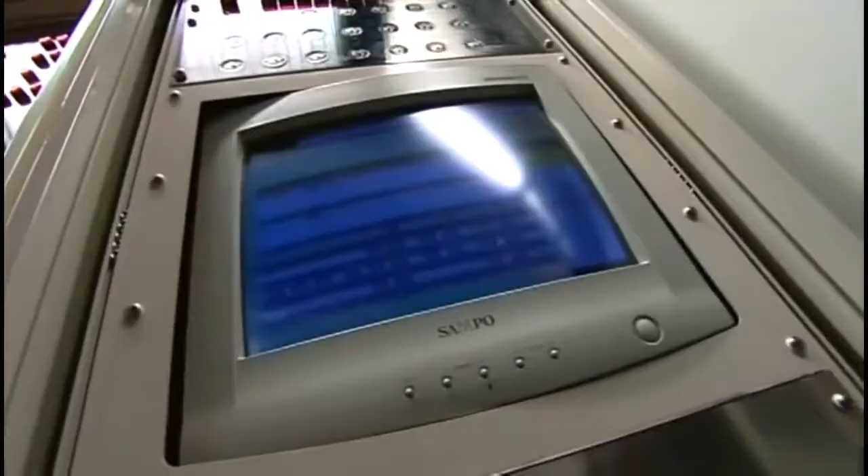It sucks in the equivalent energy as 6,000 regular homes. It's dependent on 2 designated city substations and has backup generators in case of failure. There's enough electrical cabling in 101 to stretch from Taipei to New York and back again. In case of fire, the equivalent of 2 Olympic-sized swimming pools of water is stored within the building to fuel the vast array of sprinkler systems.

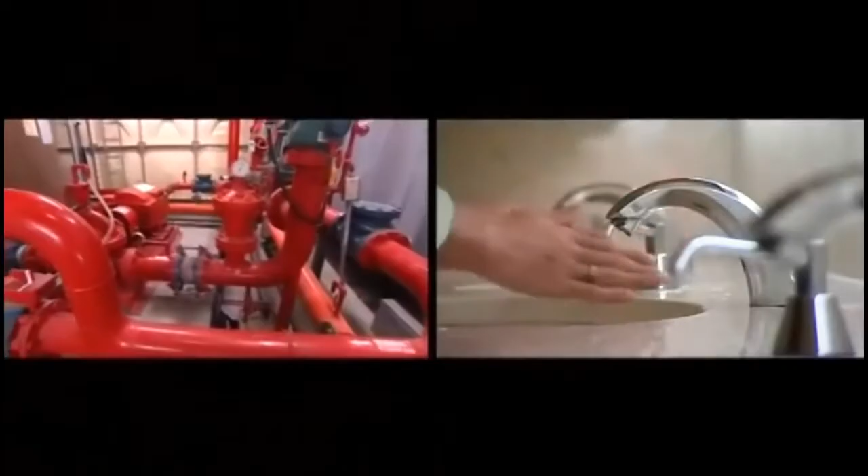Stairways and corridors leading to the mechanical floor safety zones are pressurized to reduce smoke levels and are equipped with personal emergency kits, closed-circuit TV, and, perhaps most importantly, access to the outside world. On a building of this height, matters as simple as flushing a toilet pose serious challenges. 1 liter of water falling from the top floor of 101 will have the same impact as a house brick traveling at 65 kilometers per hour. Sewerage tanks on every mechanical floor contain, process and transfer grey water safely to the ground.

The elevators are the fastest in the world. Traveling at 60 kilometers per hour, they go from level 5 to level 89 in only 37 seconds. Each carriage is pressurized to avoid ear damage, streamlined to minimize noise, and electronically balanced to ensure a ride so smooth that even a coin won't topple on the incredible journey.

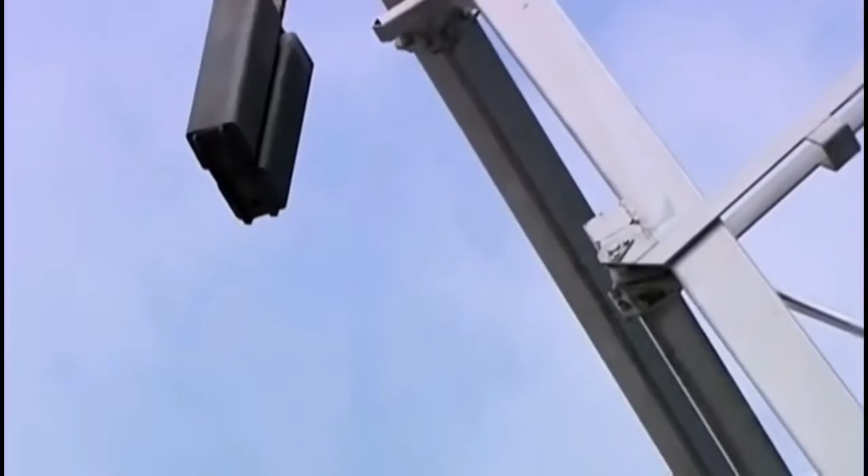To clean each of 101's 17,000 windows, custom-built gondolas dangle workers off the edge of the building. They can only work when the wind is under 10 meters per second, and even then, the cables have to be hooked into the walls to stop the gondola blowing off track. The awkward angle of 101 means that an elaborate counterweight system has to be used so that workers can get close enough to the walls to work. To clean the entire building takes 4 teams of 2 workers 3 months. The job is so big that as soon as it's finished, it's time to start again.

Inside and out, Taipei 101 pushes the boundaries. A unique-looking building that has changed the face of construction, design and engineering forever. The tallest building in the world, in one of the most hazard-prone places on the planet. Defying the powers of earth and wind, to go where no building has gone before. It's really a very, very important building. It is a landmark, a benchmark. Long after its mantle of world's tallest has gone, its achievement will remain. A symbol for the future of a proud island. A skyscraper that took on nature and won.